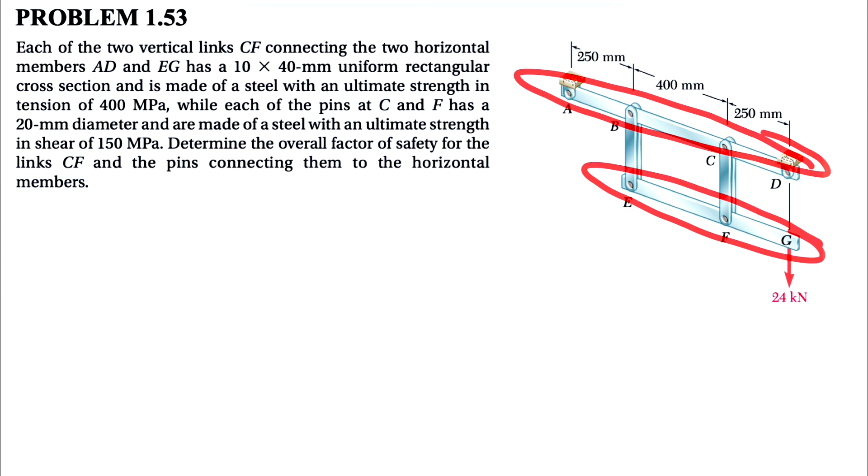So the question is referring to these two links of CF. We have one at the front and one in the back that connects the two links of EG and AD. We have the dimensions for the link CF, it's 10 by 40 and it's made of steel, and we know the ultimate strength in tension is 400 megapascal.

Each of the pins at point C and F has a 20 millimeter diameter. So we have two pins, one at point C, one at point F. Those pins are made of steel as well, and we have the ultimate shear stress in those two, which is 150 megapascal.

We need to determine the overall factor of safety for the link CF and the pins connecting them to the horizontal member. So we're dealing with two different things: the shear in the pin that might fail the system, and the link by itself. They're both made of steel, but they have different ultimate stress.

From the question, since we have the ultimate strength in tension for CF, it looks like the link CF is actually in tension. But let's see how we can figure that out.

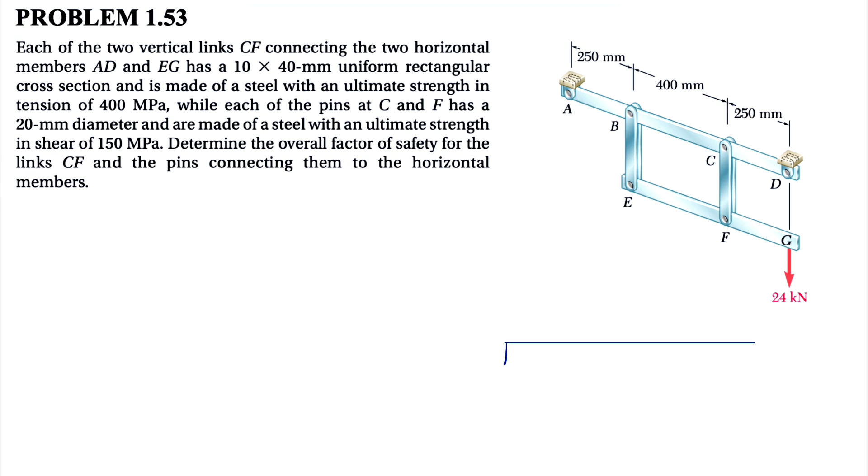So we're going to start with the free body diagram of the bottom part, or the member, or the rod EG. If we just draw the free body diagram for that, this would be the free body diagram of EG. So we're going to have the force 24 kilonewtons at point G.

We have the tension in the link, shown with this. We're just going to assume one direction for now, and this would be the force that is applying from the link to the joint F, so we're going to call it FCF. We can assume one direction for now, and figure it out based on our equilibrium equations.

So we assume that the system is in equilibrium, and we're going to use those equations that we have. Let's just assume one other force in here, FEB, in this direction. For now, we'll figure out if the direction is correct or not.

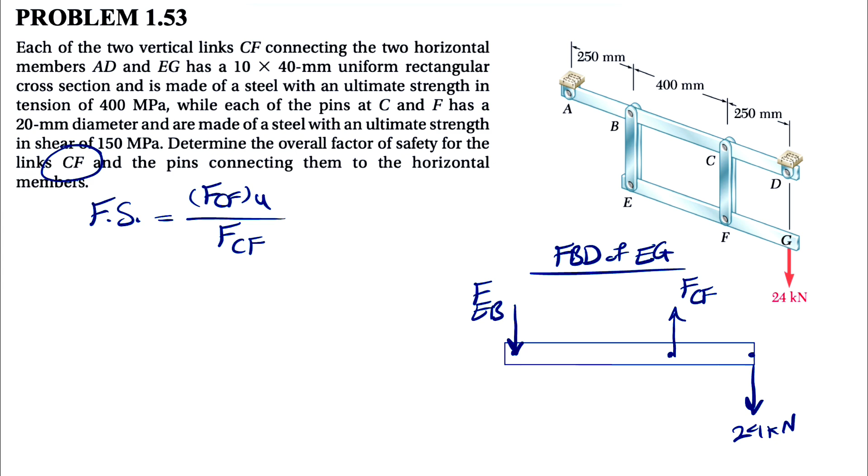What we are interested in here is the factor of safety in link CF. So the factor of safety in CF would be the ultimate force CF over the actual force that is applying at CF. So we are interested in this force FCF ultimately in this question.

As I mentioned, we are in equilibrium, or we assume that we are. When we are in equilibrium, we have sum of all forces equals 0, and we have the same for moment. We have two unknowns. It seems that if we do our moment equation about point E - this is E, this is F, and this will be G - we can get rid of the unknown at point E, which is the force in EB.

So we should be able to find the FCF in here, and we're going to call counterclockwise positive as always. We have the moment of the FCF, which if we look at it, will be in this direction, so we have a counterclockwise moment: positive FCF times the distance from E to the line of action, which is what we have in here.

400 plus 250 equals 0. The reason I didn't do unit conversion was because we have this in millimeter, and this will be millimeter too. If we divide them by 1,000 to get it in meter, it will be canceled out anyway, so that's why I didn't do the unit conversion.

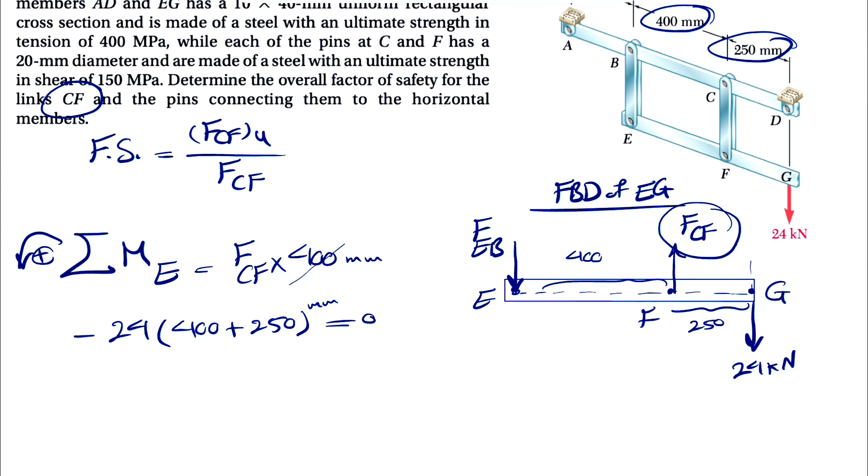So our FCF here would be 24 times 400 plus 250, that's 650, divided by 400. Let's calculate this - that's going to give us the force in kilonewton.

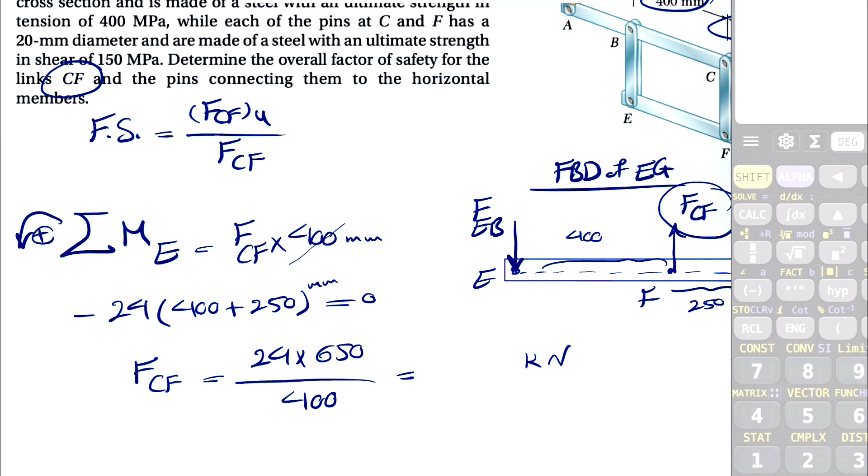So 24 times 650 divided by 400. This is going to be 39 kilonewtons as the force FCF.

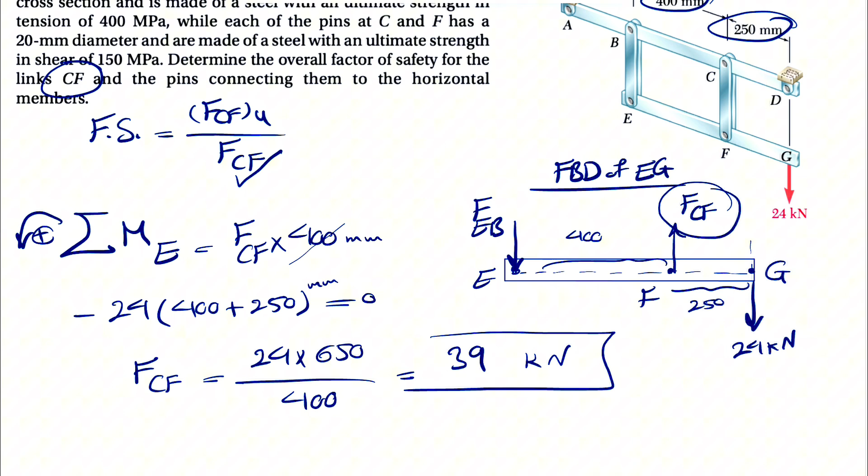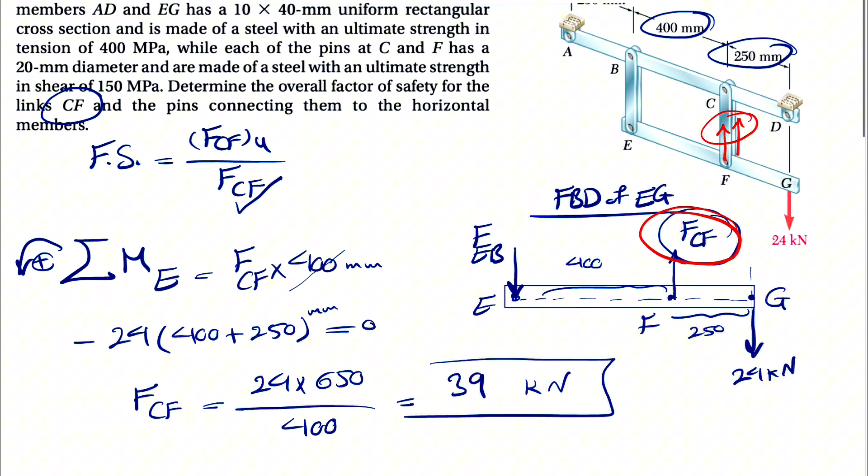So we found the denominator, but for the numerator we have the ultimate force. One thing I forgot to mention is that the FCF here is going to be the resultant of the force from each of these two links. We have two links, each with its own force, so FCF would be the resultant or net force from the two links. If we want to go with each single link, we can just put a 2 in here. But let's keep it like that for now.

But keep in mind that the area we choose later for finding the stress will be a bit affected by this. Also, at the end of this we did not get any negative sign, which shows that our assumption was correct.

This is the correct direction for FCF, which is the force from the link to the joint. If we look at the member CF, the force from the joint to the member has to be in the opposite direction, which will be downward, based on Newton's law.

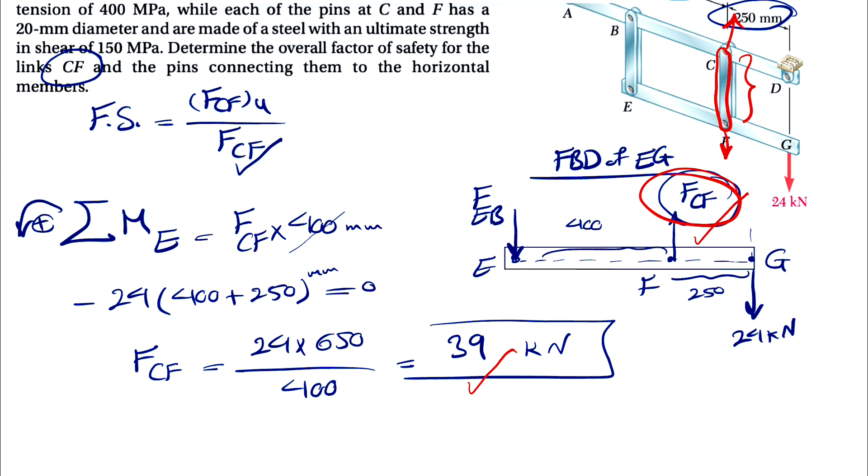So we'll see that the member here is actually in tension, and that's why the question gives us the ultimate stress in tension as 400. So now we know that the link CF is actually in tension.

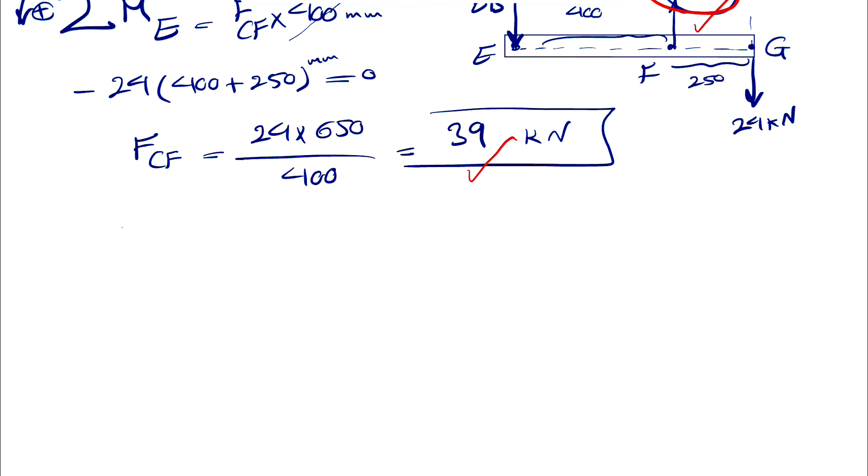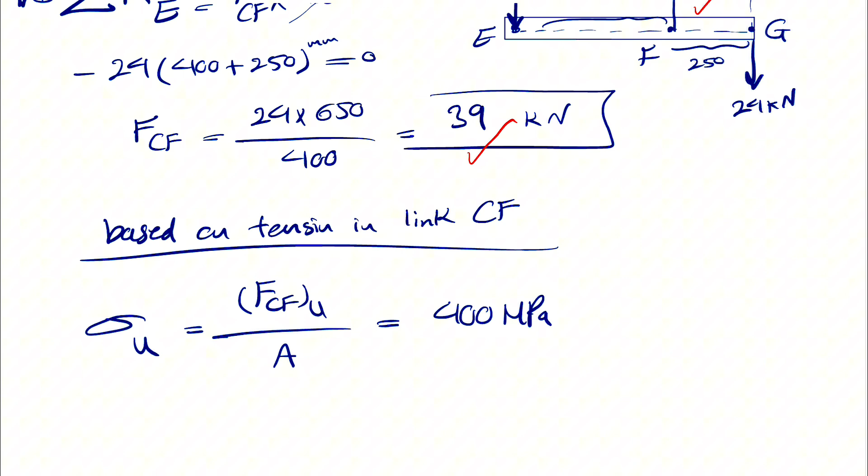So let's start with that. Based on tension in link CF, we're going to have the ultimate tension stress, which will be the ultimate force in CF over the area. We already know this is equal to 400 megapascals, given in the question. But what we need to figure out is the area.

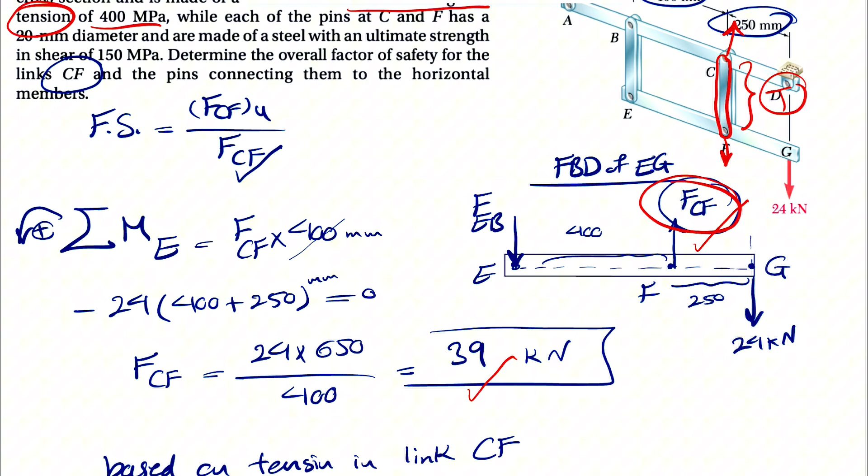Let's see what area we're dealing with. As I said, the FCF would be the resultant of the two links that we have at CF. So obviously we have one at the front and one in the back. The area we need to consider would be this area.

We discussed this in the previous question on the channel. When we have a member in tension, the location of the failure would be where we have the holes located, or where the pin is located. So the area we are dealing with for that stress would be the shaded area shown here.

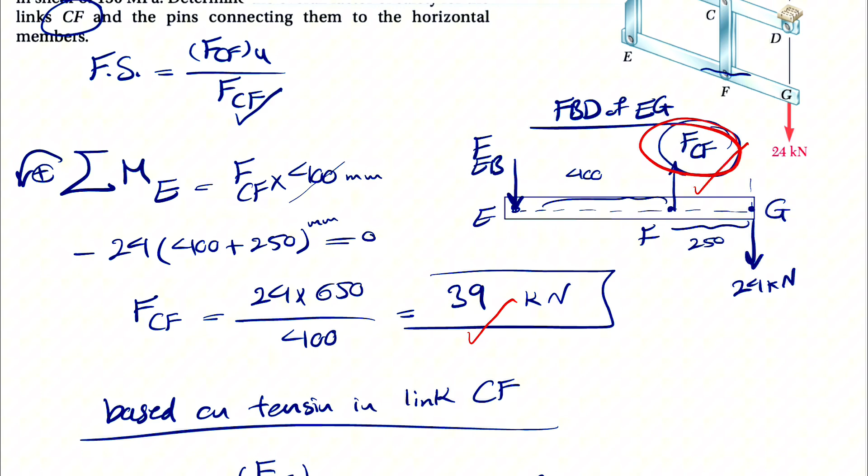If we do a cross section here, this is what we're going to see. And as I mentioned, we have two links, one at the front and one at the back, so there will be one more in the back too. So the area we're looking for would be this area.

For this, we need all the dimensions. The question says the dimension of the link is 10 by 40 millimeters, so this will be 40 and the thickness would be 10. We also have the diameter of the pin given in the question, which is 20 millimeters diameter.

So now we have to figure out the area of the shaded parts in these links. We can do it for one and just multiply by 2. So if we want to find one of them, basically we are dealing with this rectangle area.

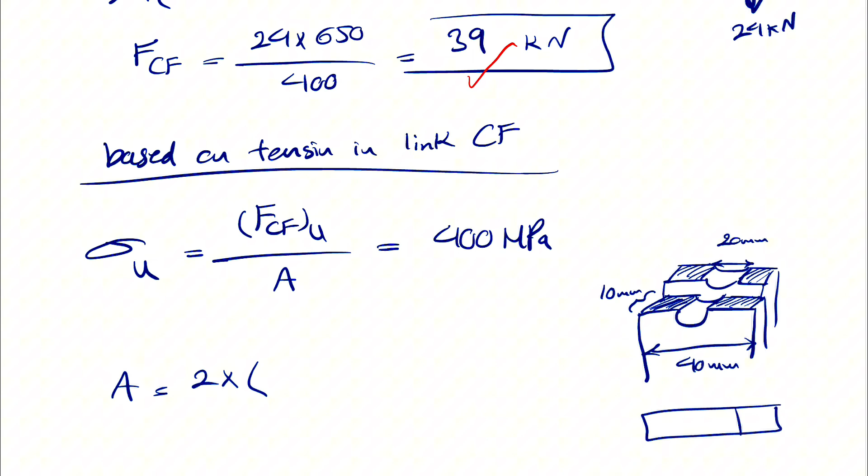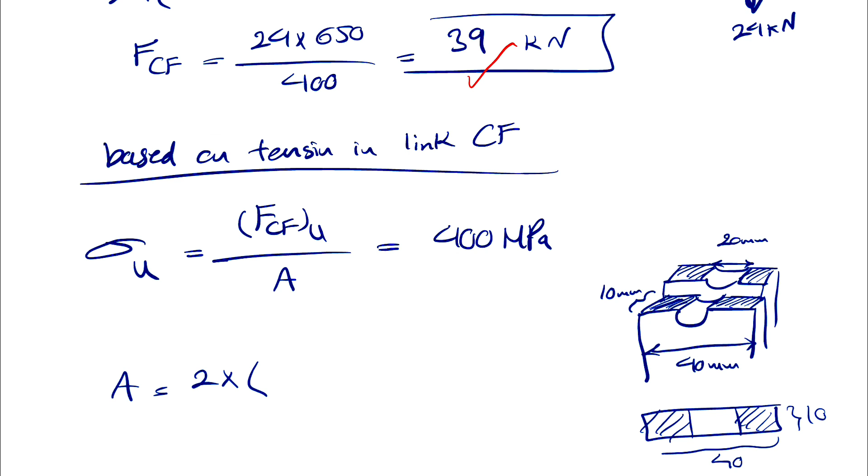So one side is 40, the other side is 10. We can show it either as 40 times 10, minus, and also we know this is 20 times 10, or we can just factor 10 in here, which will be 40 minus 20.

So that's going to be the area that we are dealing with. It's going to be 400 millimeters squared, or if you want to have it in meters squared, it's going to be 400 times 10 to the minus 6.

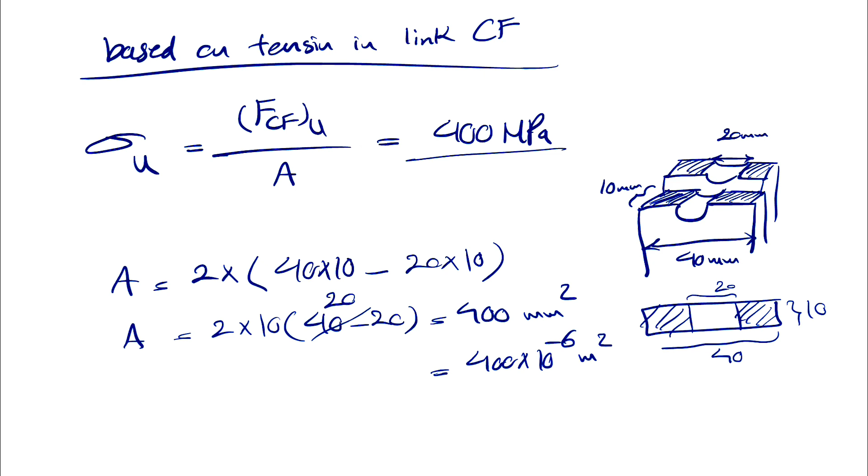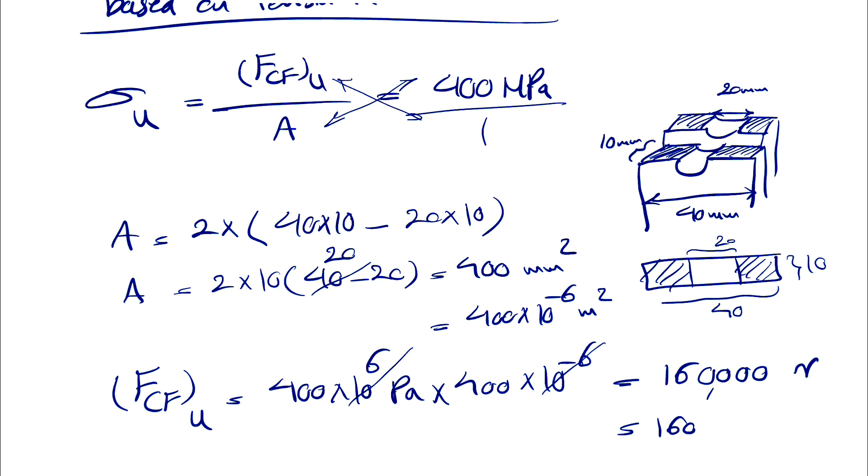So now it's easy if you just cross multiply these two, we can find the ultimate force in CF, which will be 400 megapascal or 10 to the 6 Pascal times 400 times 10 to the minus 6. So these two will be cancelled out, and we're going to get the force in newtons, which will be 160 kilonewtons.

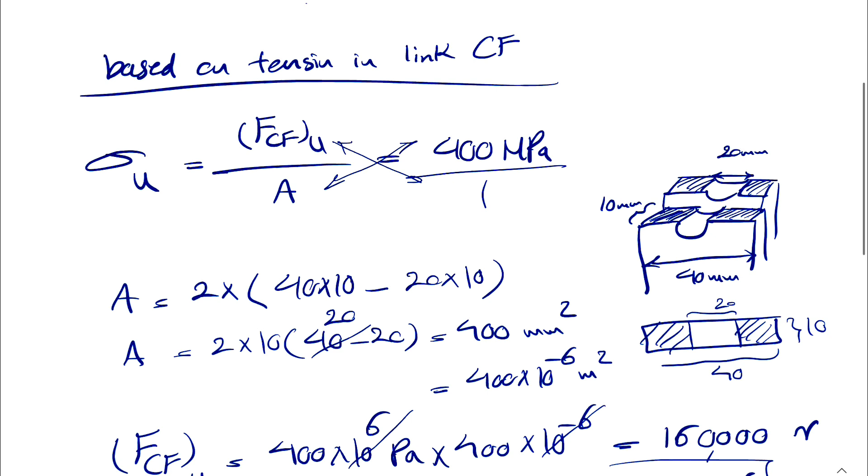So we can find one factor of safety based on this ultimate force if we get back to our formula at the beginning. So we were trying to figure this out. So we can get one factor of safety in here.

Based on the tension in the link, we're going to get 160 over the force, which was 39. Let's see what we get. 160 divided by 39, that's going to give us 4.1. And that would be our first factor of safety based on the tension in the link.

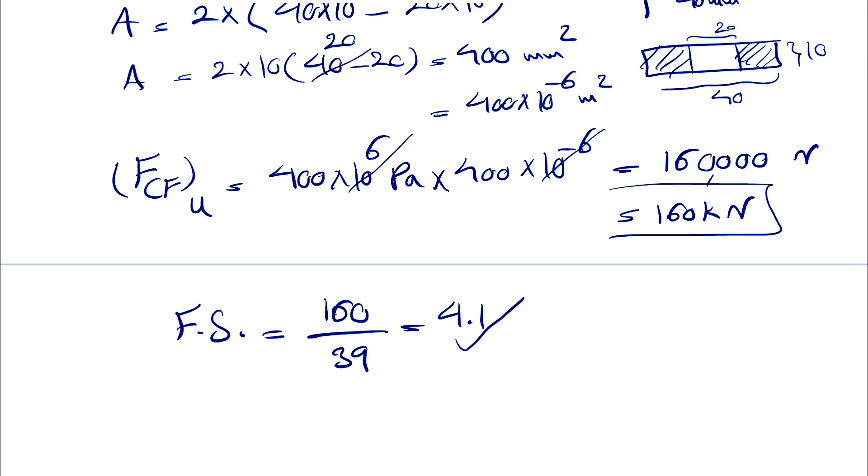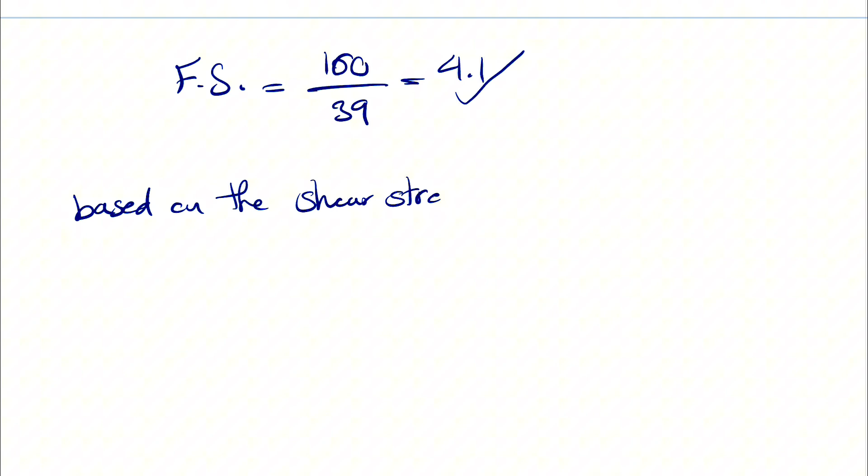But that's one part of the story. The other part is the shear stress that each pin is tolerating. So now we're going to go based on the shear stress on pins. We have the ultimate shear stress, again, the ultimate force in CF over the area.

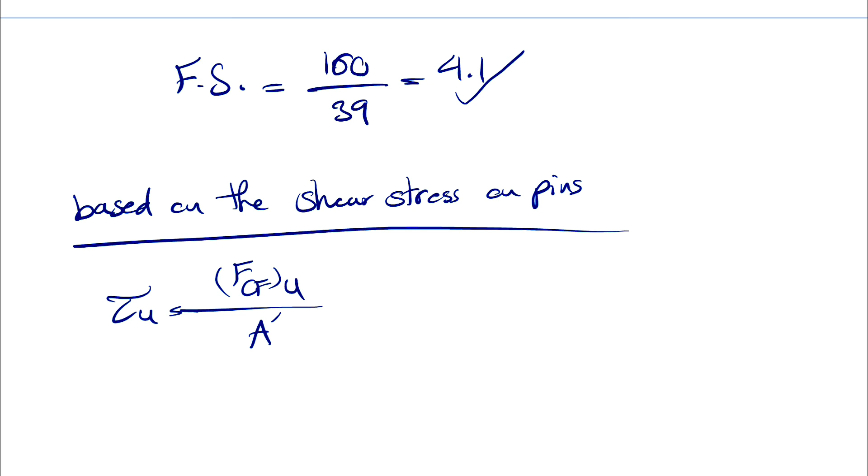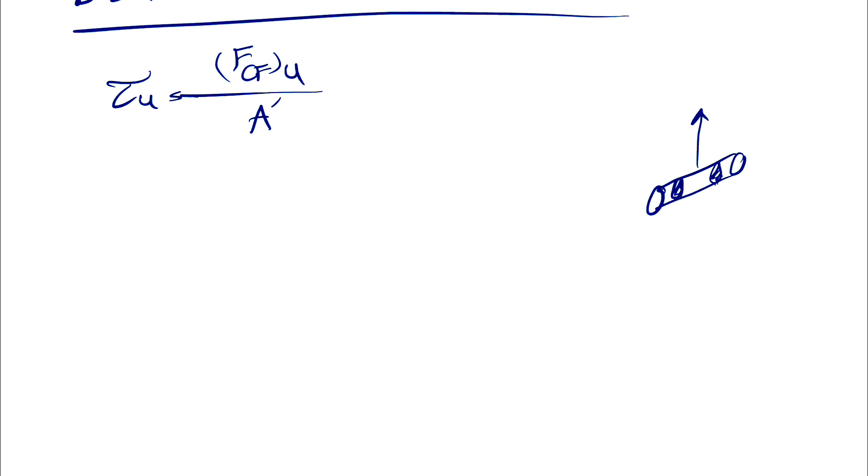Let's show it with A prime just to differentiate from the previous one. So the area now would be the area of this. We have that pin, which is going up with the force that is applying. So the area that the pin is going to experience the shear stress would be these two areas, and we have the diameter, same thing, 20 millimeter would be the diameter of each pin.

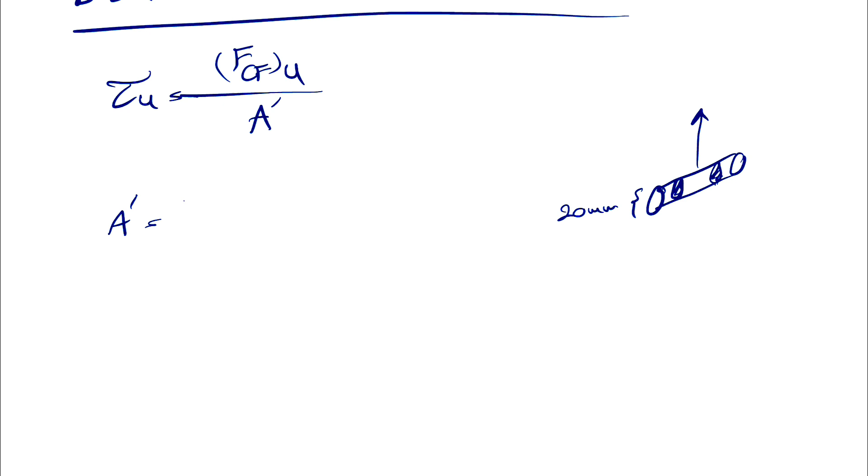So the area would be pi over 4 times the diameter 20 millimeter squared. And since we have two of these, we're going to multiply it by 2. Because this FCF that we introduced would be applied—I said that it will be the resultant of the two links. So the area engaged here is on both sides of the pin, at two sides in the pin. So we have these two areas, and the rest is pretty similar.

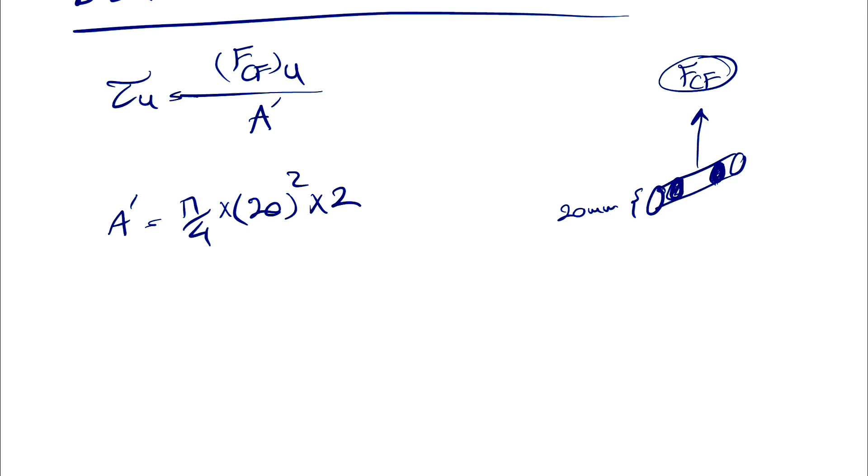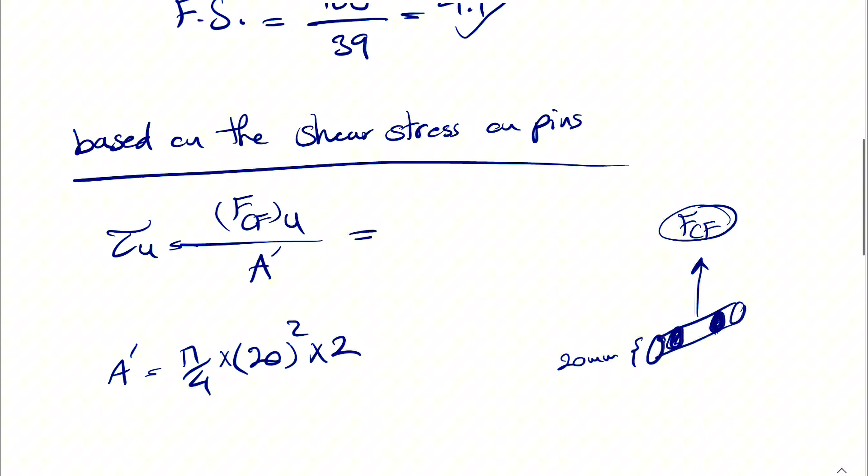And we know that the ultimate shear stress, if we get back to the question, is 150 megapascal. So this is 150 megapascal, so that's going to be times 150.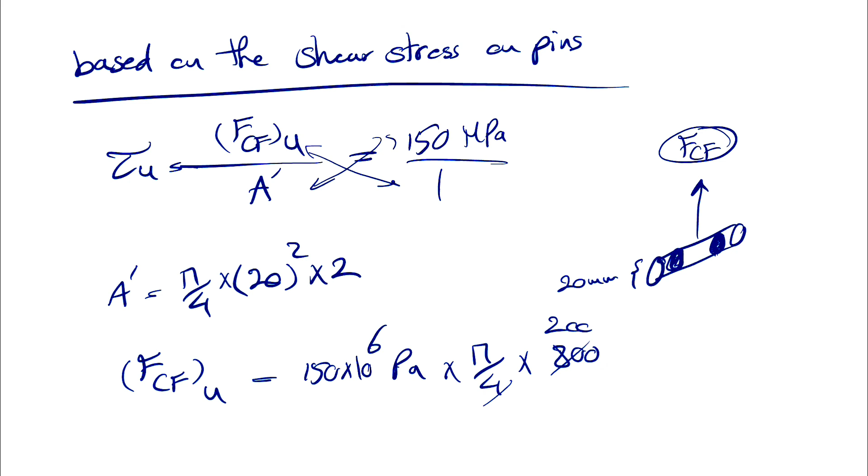So if we just cross multiply these, we can find the ultimate force in CF based on the shear stress on pins. So 150 times 10 to the 6, because it's megapascal, times pi over 4 times 20 squared would be 400 times 2, 800. And this can be cancelled out with this. So 150 times pi times 200.

Now also I forgot 10 to the minus 6 in here in order to make it in meters squared. So here we have 10 to the minus 6. So that's going to give us 94,247.8, or if you want to just report it in kilonewton, it's going to be 94.25 kilonewtons.

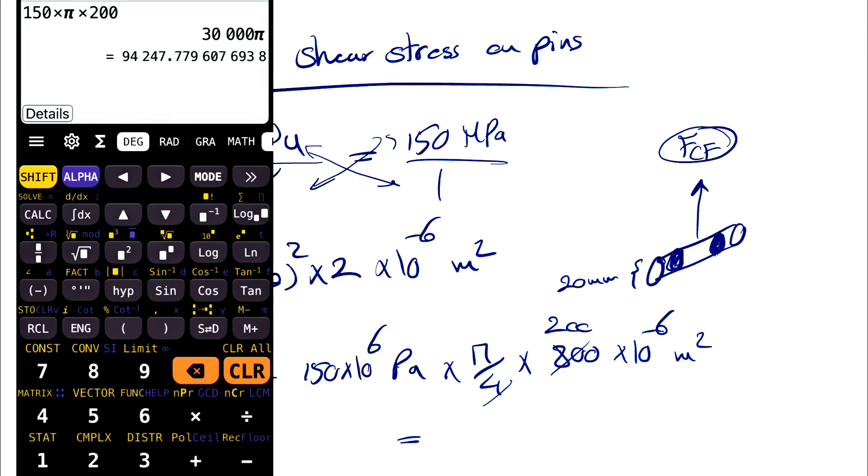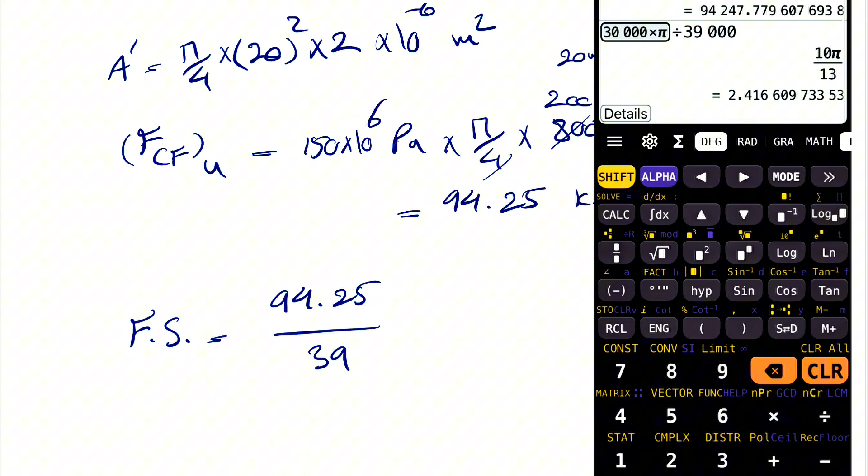So we can find another factor of safety here. 94.25 divided by the FCF that we found from our free body diagram, 39. So let's divide that by 39. And it's going to give us 2.42 as the second factor of safety.

So now we have two factors of safety, one based on the tension in the link, one based on the shear on pin. And here we're going to pick the lower one, as we discussed in the previous question. The component that has the lower factor of safety is more vulnerable to failure, so it will compromise the system.